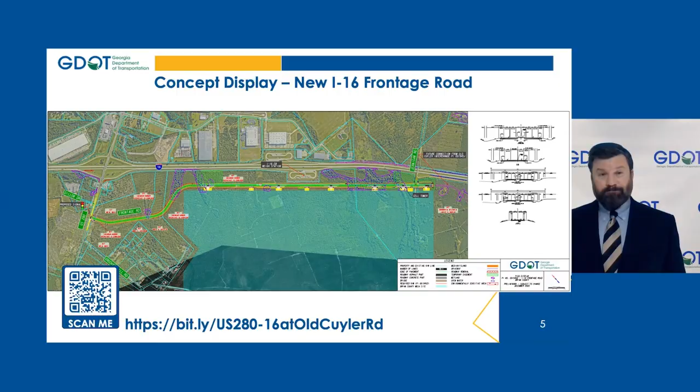Again, visit the project website for a closer look, keeping in mind that each of these concept displays is not yet final and serves as a high-level overview of each project.

Lastly, the preliminary concept display for the I-16 at Old Cuyler Road Interchange project outlines a proposed new interchange southeast of the existing Jernigan Road overpass. The project would realign Old Cuyler and Jernigan roads and include a new bridge over I-16. In addition, the project would construct roundabouts on Old Cuyler Road at the I-16 ramp intersections, as well as the intersection with the new I-16 Frontage Road project. The I-16 at Old Cuyler Road Interchange project would improve traffic operations by diverting traffic away from the existing I-16 interchange at US 280 and other local roads. It would also help accommodate future traffic generated by the new economic development in this area.

If you have questions about any of these preliminary concept displays for the proposed projects, we encourage you to ask our subject matter experts during our question and answer portion of this virtual meeting.

As you can see on the project timelines, all 3 proposed projects are going through the environmental process and public comment period together. However, they are not all on the same timeline for construction. Design build team selection on PI 0019-452, the new I-16 Frontage Road project, will take place this year, followed by the start of construction by the end of the year. The next steps on the US 280 widening project are design build team selection and start of construction, which will take place in 2024.

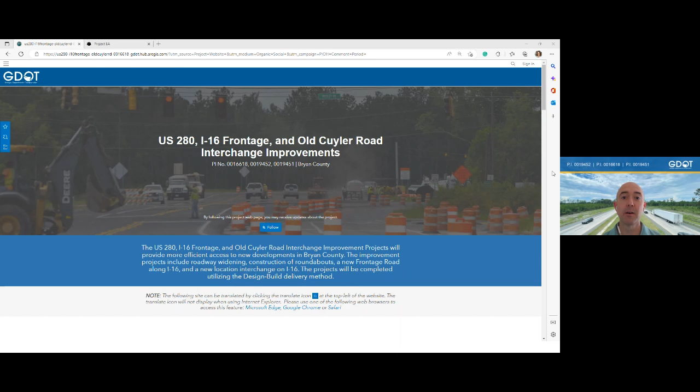So as you can see, it's the main project page. This is going to continue to live throughout the duration of these 3 projects there in Bryan County. Once you get to the web page, scroll down and look for the virtual meeting room. You see Ron Nelson's avatar there with GDOT Office of Alternative Delivery, so you click and enter that meeting room.

And there's Natalie Dale that we talked about earlier with GDOT Communications, who provides a wealth of information through the welcome video to tell you how to best navigate this space. It's a virtual version of what you'll see tomorrow if you come join us in person at the Board of Education. There's fact sheets, you see the combined handout there, and the overall project view, which encompasses the entire interchange, the proposed frontage road, and also the new interchange at Old Cuyler Road.

If you look to the right side of your screen, you'll notice different tabs that are project specific. So just for example, we'll go to US 280 first and click on that one. Same deal, you see another friendly avatar, which is Marlo Clowers, one of our lead managers within the Office of Alternative Delivery at GDOT.

Same deal, you see the proposed typical sections you can click on. You can zoom into a PDF of the proposed design layout, which is very helpful. Also a project-specific handout, which really gets down into what's out there now, the conditions we're facing, and also the development of the proposal to improve things as it relates to things adjacent to the Bryan County megasite.

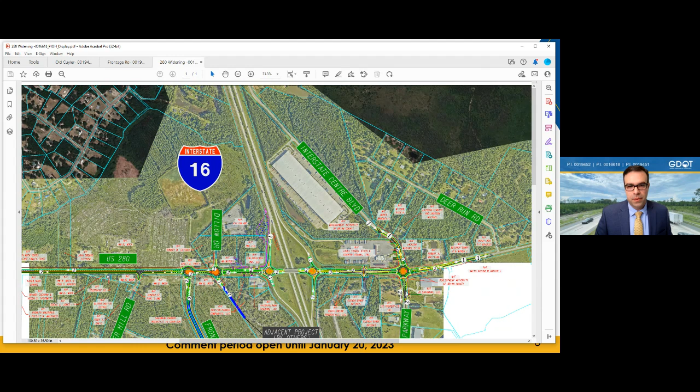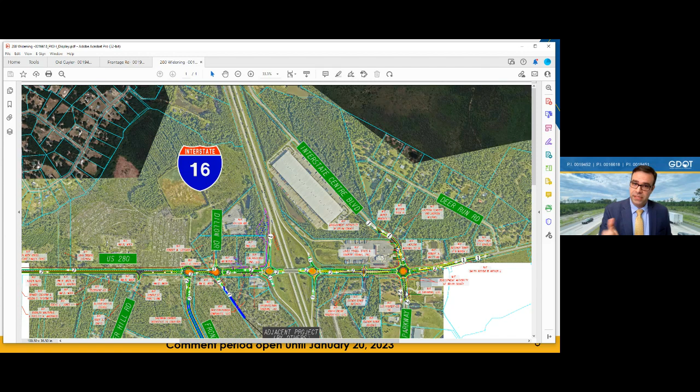We know in this project there are going to be roundabouts around the I-16 ramps, and also roundabouts near US 280 and the frontage road. On the screen we have a diagram, and as Kyle mentioned, you can go to the website and look at this yourself, download the PDF, zoom in, and take a closer look. On this specific layout, you see the area near I-16, towards the right side of the screen, with a number of roundabouts: a pair at the Frontage Road and Dillon Drive, a pair at the interchange ramps, and one further to the right. North is roughly to the right and up a bit in this plot.

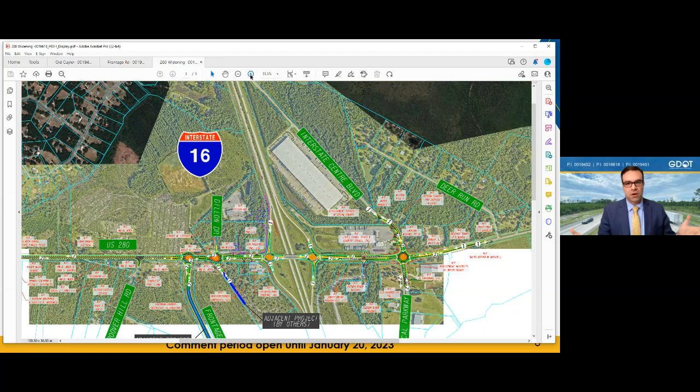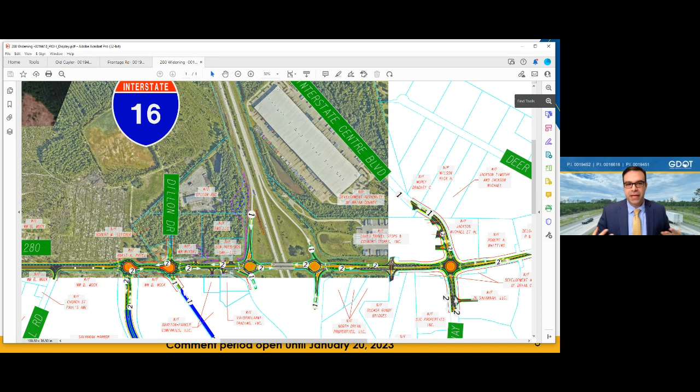So you see how close together these intersections are to each other. If we were to mix and match roundabouts and signalized intersections, they would not have the same level of operational efficiency. I know that was a long question and a long answer, but I think a lot of people probably have some variation of this question, so I wanted to take my time and walk through the rationale. First, why they could be selected as roundabouts has to do with the modeling we've completed. The second part is just the proximity—these intersections are close to each other and will operate most efficiently when paired up like this. Very good question, thank you.

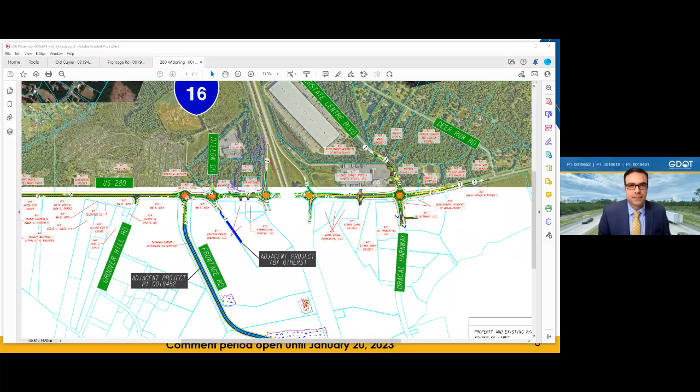Thanks, Jonathan. Greg had sent us another question right after I asked mine, which is kind of what we just covered. I'll read through Greg's comment. Lastly, based on previous things we've heard, there will be a roundabout at 280 and 80 in Black Creek at the post office. So does that mean if I'm coming from the Black Creek post office through Blitchton in 3 years, I will go through 7 roundabouts in 2 miles? He gave us the exclamation—7 roundabouts. That's definitely something unique in this part of things, Greg.

With that many roundabouts, people are going to be dizzy going to work.

Well, we don't think you're going to be dizzy. Like Jonathan said, for operations it's going to support things—it's going to be able to move large trucks. And also, as a daily driver, it's going to serve as a traffic calming mechanism. So it'll be able to process a lot of cars, but it's going to reduce speed, reduce the possibility for angled crashes, and make things much safer. So yes, some big plans coming, not only with our work proposed here on 280, but also future projects with the county and GDOT District 5.

Let's see—Greg, thank you for sending us some questions. I'll read this one: our community water well will likely be impacted, how is this being handled? Again, Greg is on Aspen Lane. Ron, could you help us out with this one, related to the community water well and how there may be impacts?

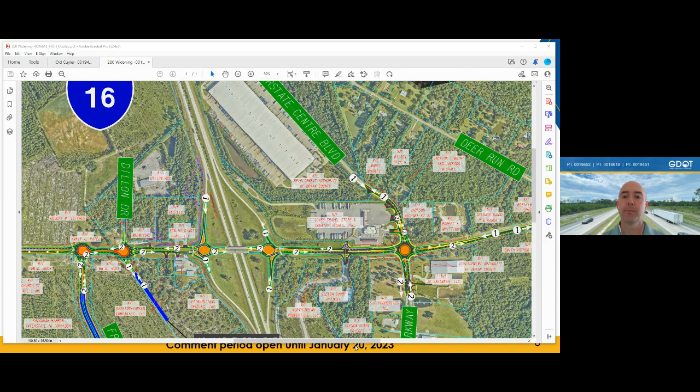I'm going to kick a question to Matt next. So if we could zoom in to the Olive Branch side of the layout. Matt, this question relates to folks who may wonder what looks like a runaround of some sort in this area. Could you break that down for us on what that is and why we're proposing it?

Thanks, Kyle. I'd love to. That is a jug handle, and it's going to service a U-turn movement for anyone that misses their turn, their left turn, specifically for the frontage road, where you see that blue with the signal there. If going into the mega site, if anyone were to miss their turn in, they would be able to make an immediate right into the jug handle, then make another right onto Olive Branch, and subsequently make another left back onto 280, and be able to U-turn, in a sense, back into the direction they were intended to go. Thanks for the question, Kyle.

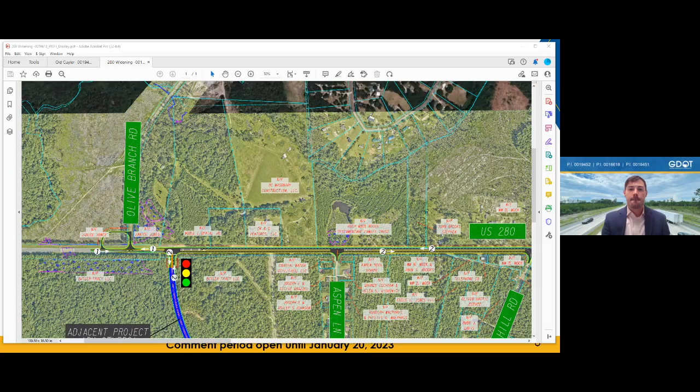I appreciate that, Matt. We're going to take a few seconds to run through the project description video again, which Ron Nelson, who y'all have heard from today, our main project lead from the Office of Alternative Delivery, narrates. Let's run through that again and hear from Ron.

Thank you, and thank you to everyone for joining us today to learn more about the proposed US 280 widening, I-16 frontage road, and I-16 at Old Cuyler Road interchange improvements. Let's get started.

Before we get into the details of this package of proposed projects in Bryan County, it is important to understand why projects like these are needed. Georgia attracts many businesses, which in turn bring jobs. Our lifestyle and standard of living are just two reasons companies choose Georgia, and our skilled, educated workforce supports it. As Georgia continues to grow, Georgia DOT is committed to responding when economic development opportunities are presented, or when there is planned growth that requires action to ensure safe and more efficient access for the traveling public. The proposed US 280 widening, I-16 frontage road, and I-16 at Old Cuyler Road interchange projects were developed with these considerations in mind.

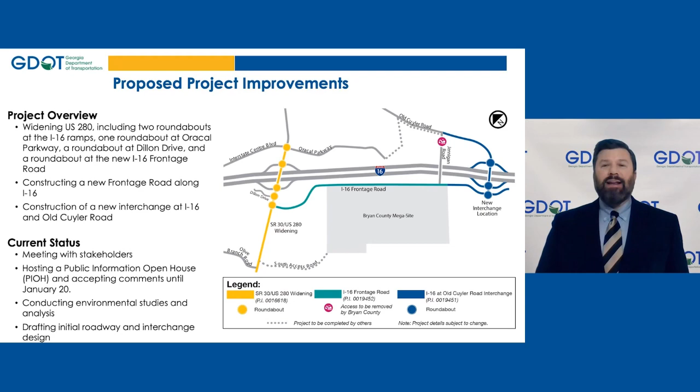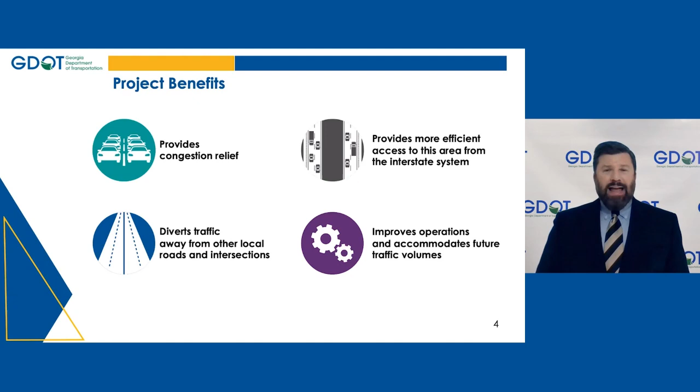The mega site development will provide thousands of jobs for the region and will be dependent on optimal access for motorists. The proposed improvements will offer several benefits to the corridor, including providing congestion relief, diverting traffic away from other local roads and intersections, providing more efficient access to the interstate system, and improving operations to accommodate future traffic volumes. In addition, the design-build method being used to complete the projects will encourage greater delivery efficiency and support accelerated schedules.

The project team has developed a preliminary concept display for each proposed project. Here you see the preliminary concept display for the I-16 frontage road project that would provide more efficient access to the new economic development already under construction. The new roadway would consist of 4 lanes and a center median. By accommodating traffic generated by the mega site development, the new frontage road would ease traffic congestion in the area.

Preliminary concept displays for each of the proposed projects are available in the virtual meeting room on the project website. Please take a moment to visit the web address you see on your screen for a closer look. When you're reviewing the concept displays, keep in mind that the details are subject to change as these proposed projects move through the design-build process.

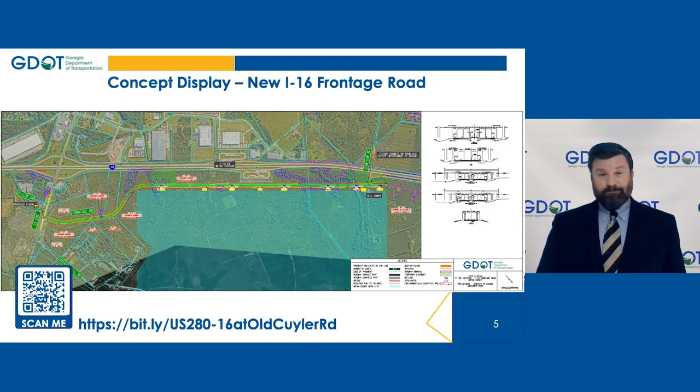The US 280 widening project preliminary concept display shown here illustrates the proposed widening of US 280 from 2 lanes to 4 lanes from southwest of Olive Branch Road to just north of Oracal Parkway. In addition to roadway widening, roundabouts will be constructed at the intersections of the new Frontage Road, Dillon Drive, both interstate ramps, and Oracal Parkway. These types of improvements help to reduce crashes and improve operations at these intersections. The US 280 widening project would also provide congestion relief due to anticipated future traffic volumes.

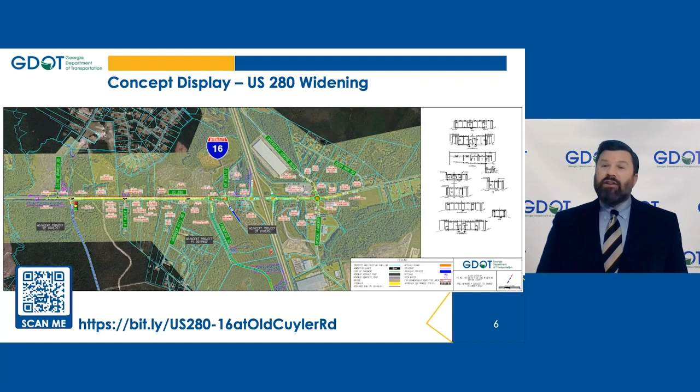Again, visit the project website for a closer look, keeping in mind that each of these concept displays is not yet final and serves as a high-level overview of each project.

Lastly, the preliminary concept display for the I-16 at Old Cuyler Road Interchange project outlines a proposed new interchange southeast of the existing Jernigan Road overpass. The project would realign Old Cuyler and Jernigan roads and include a new bridge over I-16. In addition, the project would construct roundabouts on Old Cuyler Road at the I-16 ramp intersections, as well as the intersection with the new I-16 Frontage Road project.

The I-16 at Old Cuyler Road Interchange project would improve traffic operations by diverting traffic away from the existing I-16 interchange at US 280 and other local roads. It would also help accommodate future traffic generated by the new economic development in this area.

If you have questions about any of these preliminary concept displays for the proposed projects, we encourage you to ask our subject matter experts during our question and answer portion of this virtual meeting.

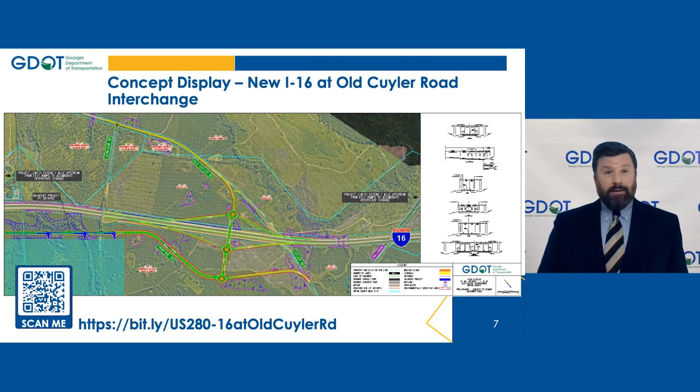The next steps on the US 280 widening project are design build team selection and start of construction, which will take place in 2024. And construction of the proposed new I-16 interchange at Old Cuyler Road, PI 0019-451, is not scheduled to begin until 2025, with a public hearing open house taking place in 2023, followed by the design build team selection. It is important to note that the schedule for each of these proposed projects is subject to change.

Georgia Department of Transportation is responsible for reviewing projects and filing appropriate documentation to ensure that all projects comply with applicable federal and state laws and regulations. Because the new I-16 at Old Cuyler Road Interchange Project 0019-451 is funded through the Federal Highway Administration, the team will follow the National Environmental Policy Act, also called NEPA process. The other two projects, US 280 widening project 0016-618 and the new I-16 Frontage Road project 0019-452, will follow the Georgia Environmental Policy Act, or GEPA, environmental process.

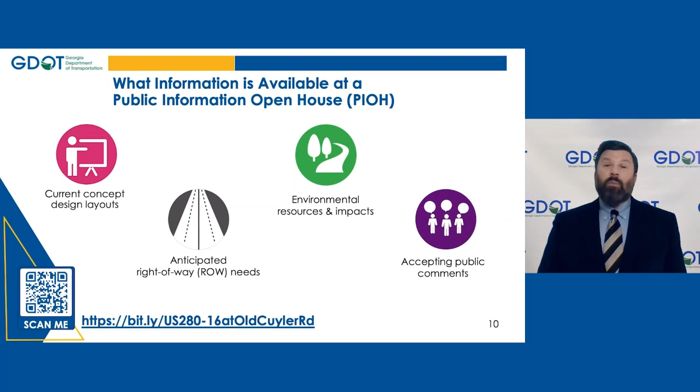Now we will go over how to navigate the interactive public information open house virtual meeting room platform. Thank you again.

That was helpful to see the overview of these three projects as it pertains to the Bryan County improvements that we're looking at. So thank you, Greg, for firing another question in here. After I read this one, it's going to go to Matt to help us walk through things.

So this pertains to Dillon Drive. Could the two that are close together, meaning the roundabouts at Dillon, Transport Road and the Frontage Road, be one larger roundabout with more exits and entrances? It seems tight. Got to practice my NASCAR skills.

I appreciate that, Greg. We don't want you driving NASCAR through here, so please be safe. But Matt, could you just talk through the design of that Dillon roundabout specifically?

Sure. The preliminary design does combine two roundabouts near Dillon and the transport road in a teardrop configuration, which essentially makes one large roundabout that functions just like one singular one. Another reason they can't be any closer would be the proximity of the cross streets. So it's designed in a way to minimize impacts to the surrounding parcels, and it will effectively act as a large singular roundabout.

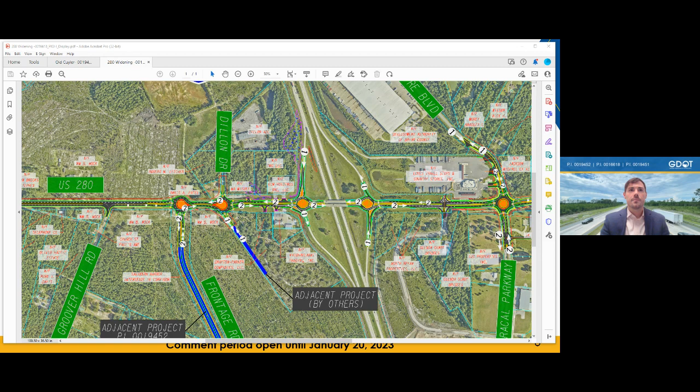Hopefully that cleared it up for you, Greg, as it relates to that Dillon Drive roundabout proposal. So looks like we have another question that came in from Sheila. This is going to be a property acquisition, which is a right-of-way question. So I'm going to kick this to Phil after reading it. Sheila wants to know, do you have a list of properties to be impacted, and has the acquisition process already started? So Phil, can you help us there?

Sure, thank you, Kyle, and Sheila, thank you for your question. There is not a list per se of the properties that are impacted, but if you visit the concept layouts mentioned earlier in the virtual meeting room, on those concept layouts there are lines that represent the existing property lines, shown in a lighter baby blue line showing what we understand to be the existing property boundaries. If a property is anticipated to have a right-of-way acquisition, there will be a heavier red line that encroaches into that property, indicating what we anticipate to be the right-of-way acquisition as we know it today. As we further refine the design and the concept, we'll be able to determine exactly what the right-of-way needs are. So again, if you visit the right-of-way concepts, you will see property representations, red lines to indicate where properties are anticipated to be impacted.

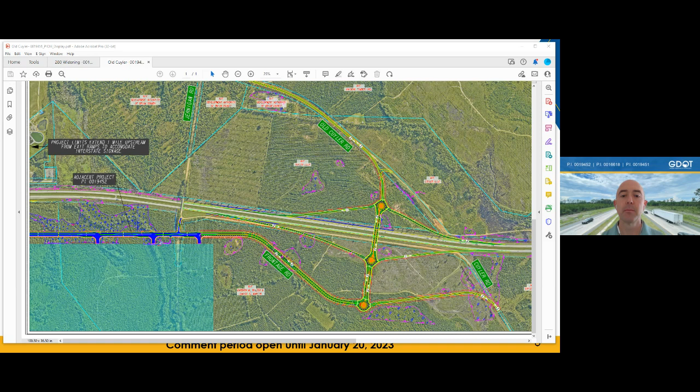So just generally, Ron, from a high level, folks may be curious why we need a new interchange here. Do you want to talk through how this ties into the overall positive aspects of this project for traffic management?

Absolutely, Kyle. So these projects will all tie together. We're anticipating, as you can imagine, a large corporation like the Hyundai Corporation coming in, and it's going to be pretty drastic as far as how it affects the way this area has been put together operationally. With the frontage road bringing traffic to or from US 280, parallel to the eastbound behind the weigh station vicinity, it'll carry it a little further east by about a mile or so. We anticipate relieving some of that congestion from having to go back into exit 143, the existing interstate exit in Bryan County on I-16, by providing another interchange to the east that will facilitate traffic coming out of the Savannah area westbound, and allow return traffic to move back towards Savannah eastbound on I-16. So they'll all work in concert.

All this has been carefully planned and orchestrated. If you come out in person tomorrow evening to the PIOH there in Bryan County, you'll see much more evidence of how these projects have been carefully planned, very well thought out, trying to develop and understand how to meet the future traffic congestion needs in this area to relieve those issues. There's a lot of forethought going into what's taking place here with all 3 projects together. I hope that answers the question there, Kyle. Good question.

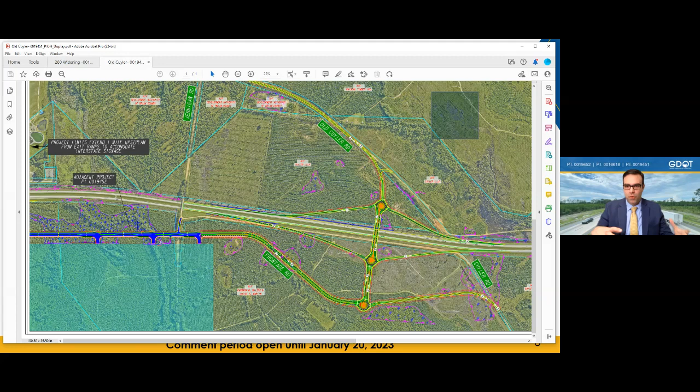As we've discussed, future developments anticipated in this area could bring significantly more traffic. One strategy to help distribute that traffic is to have more than one option for interstate traffic to exit, which may be closer or more efficient depending on location, time of day, or type of traffic. We look at traffic patterns and who's using the roads at what time. Passenger vehicles may use these interchanges at specific times, while truck traffic chooses different times. One benefit of this interchange location is that it provides a second alternative for traffic coming to this area with potentially greater demand.

In addition, when thinking about this interchange at Old Cuyler, you may have different traffic patterns crossing each other at different times of day. You could have someone coming from the west exiting to head towards the frontage road, or someone coming from the east deciding to go north along Old Cuyler.

What roundabouts do, without needing a traffic signal, is allow the free flow of traffic that Matt was describing earlier. Kyle did a good job describing how to use a roundabout earlier in our discussion. As traffic patterns evolve throughout the day, the roundabout is a proven method to distribute that traffic and allow users to navigate through to their needed direction without major disruptions.

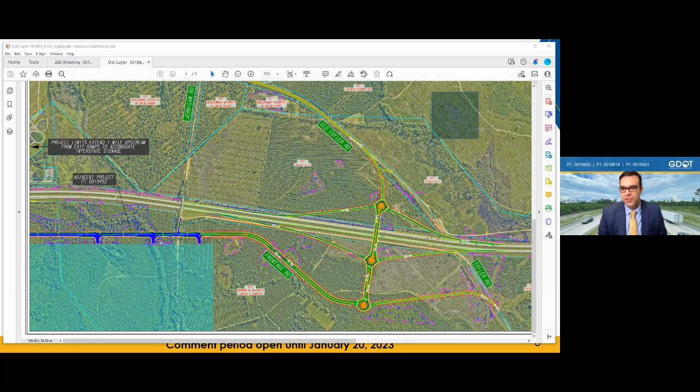Hopefully that provides additional perspective on the traffic patterns in this area, specifically regarding US 280 and how this gives additional options for people traveling in this area to exit I-16. Thank you for the question.

I appreciate that, Jonathan. We had another question related generally to the public information open house, which is part of the process we're doing today. Basically, is this the first PIOH you've held, and how will the community be informed following the PIOH?

Yes, this is the first official meeting. There's a live session we're doing, and there's also a second meeting, an in-person one tomorrow in the 280 corridor at the Board of Ed. We also have a website, which counts as an additional virtual open house footprint, and you have until January 20th on the site we described today to leave comments and feedback. That site will continue to live and the overall project site will continue to be updated as we get closer to awarding these projects in the coming years, with construction updates too. So that's the best way to get plugged in via the website.

Make sure you follow us on our social media channels as well, Georgia DOT. We're very active on Facebook and Instagram, and we have a dedicated Georgia DOT Southeast Facebook page that our district communications manager, Jill Nagel, does a great job keeping updated. That's an additional way to stay plugged in on what's happening on 280 Frontage Road and Old Cuyler.

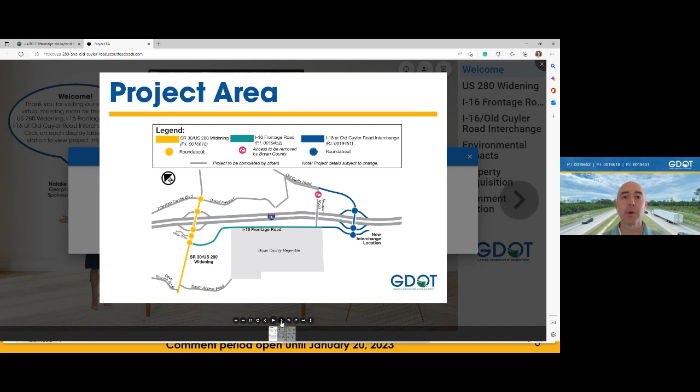You saw the project schedule, which Ryan talked about earlier in his address about these jobs. You can kind of see where the tiered approach is of what's coming first. So as a reminder, frontage road will come first, followed shortly later by the 280 project. And then the final one will be that new proposed interchange at Old Cuyler.

So going from there, let's click on that 280 widening tab on the right. That seems to be the most popular question topic today. And we just heard from Marlo, who's a program manager with Alternative Delivery. She talked about the great ways that that program and its delivery model makes things efficient on these jobs, gets them done in a quick fashion, making good use of the tax dollars, and also innovative concepts within those projects.

So you can click on the typical section there. That's basically showing what it's going to look like. That's a rendering schematic going from 2 to 4 lanes. It shows what that section is going to be in the middle too. You see a box truck, which we're seeing a lot of, and 18-wheelers, no doubt, coming through this area, as well as y'all in the future. So it'll be able to handle everybody, specifically with the roundabouts.

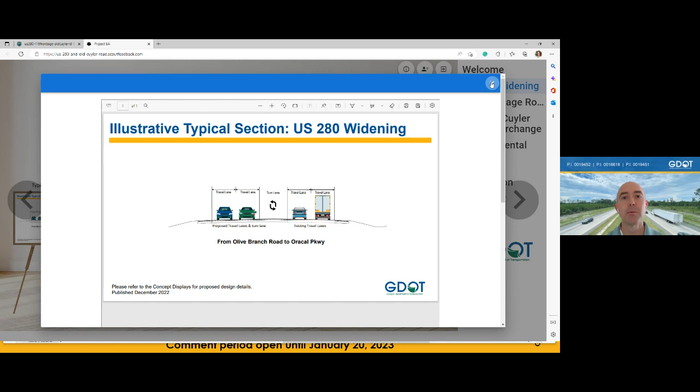And the main thing too on this page, on those right tabs, is that comment section. That's what we really want you to go to let us understand what your concerns are. Again, positive, negative, we want it all. So it doesn't take long to click on there. You can, as you can see, if you just do a general comment about everything, you can select that, or you could do project specific comments.

So this website is going to continue to live on. You can only make comments up until January 20th, so I wanted to remind everybody about that. In addition to that, which we'll talk about when we wrap up, is our in-person meeting, which is happening tomorrow. All of us will be down in your backyard at the Board of Education from 5 to 7, talking about the same topics. We're just going to be live and in your face and not on Teams. So hopefully that will be beneficial to y'all as well.

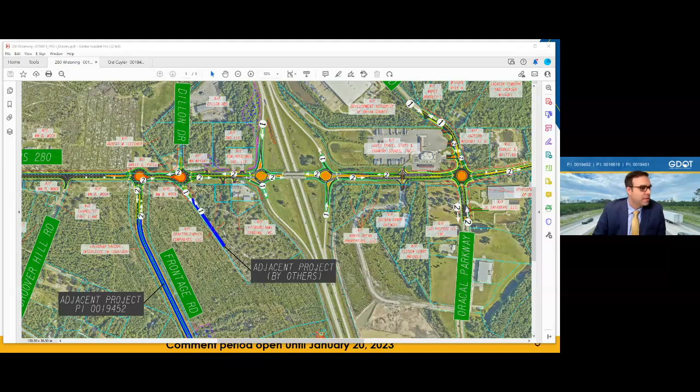Absolutely, so I think we can put the layout on the screen. Thank you very much. What we can do is look at this and visualize as if we were driving through this together. So what we have on the screen is US 280, and as Kyle was describing, we would go from south to north. South is towards the left side of the screen, and we're going to be traveling from left towards right, or from south towards north generally.

As we start on the left, near Groover Hill Road, we're already at a point where the road will have been widened from a 2-lane road to a 4-lane road. As you look at that location, the median there is what we call a 2-way left turn lane in the center. That means there is not a raised median at the very left side of the screen. There's a turn lane you could move into, and if you needed to take a left, you could do that from that center turn lane.

As we move from the left side of the screen, headed north towards the right side, we start to approach the roundabouts. As we approach the first roundabout, located at the Frontage Road — that's the first roadway in blue you see, called Adjacent Project or Frontage Road here — you will slow down, check to your left, and yield as you enter the roundabout, assuming there's no one already in there. In this exercise, we're going all the way to the right.

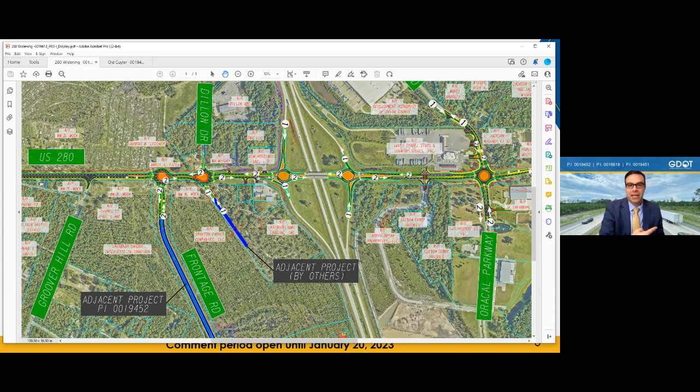If at any point you decide you needed to turn around and go back in the other direction, any one of these pairings of circular roundabouts could be used to effectively make a U-turn and head back the other way. So if you missed a turn, or you were coming out of a property and needed to take a left but can only go right, the roundabouts give you that full accessibility to go any direction you need in a very short area.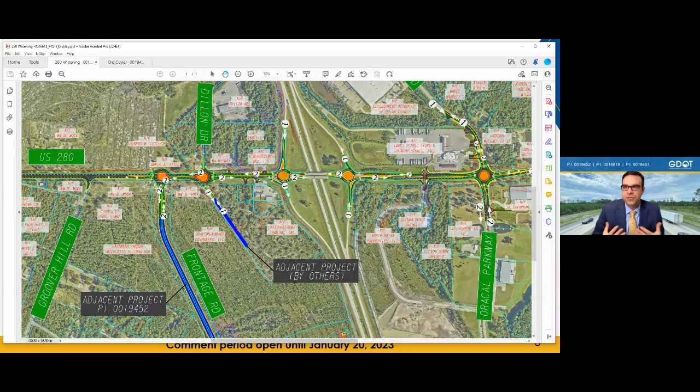So Kyle, hopefully that answers your question. I can certainly understand why people would be interested in understanding how to use these roundabouts. I do encourage those who want to understand better to go to the website, open these PDFs, take a look. If you have any further questions, please don't hesitate to reach out to us. We'd be happy to get back to you, or you can come see us at the in-person meeting tomorrow. Thank you for that question.

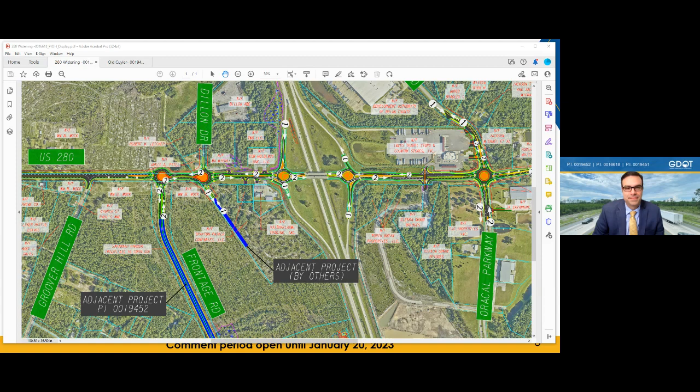Awesome, Jonathan, thanks for taking us through that from a bird's eye perspective. I've got 3 more minutes left. We do have one question here, and I'm going to answer this a little bit, Ron, then I'm going to kick it to you: right now it takes forever to get off I-16 here at this exit at 280.

How will traffic get better? I know we're potentially working on an interim type solution before these projects are delivered and complete, to help with the ramps. Obviously we're showing now in the layouts that we have the roundabouts, which will be in the final configuration. How would you like to talk about how things are going to get better with these projects as it relates to that interchange, Ron?

As we're continuing to refine the design associated with this project, as far as widening 280, we're also attempting to take into consideration what the current traffic conditions and patterns are. We're evaluating the intersection at the westbound off-ramp and 280, and also the eastbound off-ramp and 280, taking into consideration from an interim standpoint what those operations and traffic patterns look like from a peak hour standpoint - morning, afternoon, evening.

I do believe we'll have some type of end result probably in the near future, but don't really know exactly what those numbers are going to show from a definitive standpoint. But we do know we're going to make some type of improvement there, and we should have something moving forward probably in the not too distant future as far as guidance and direction. Then we'll be able to share more of that with the public as we move forward, to better understand what our design team has come up with from an interim standpoint, until that widening and those final roundabouts at the ramp terminals are actually in place.